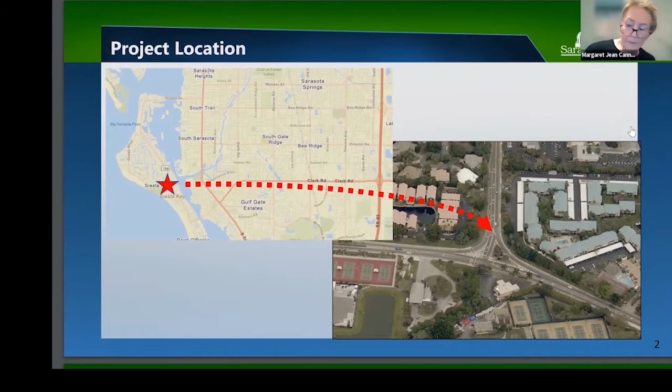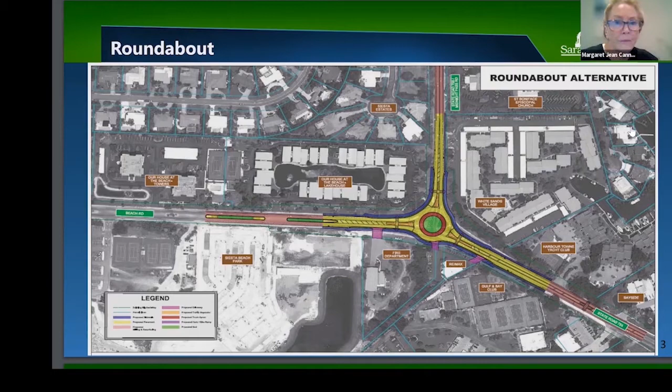This is the general layout. Last time I was here was probably a couple years ago, at least last year. So we talked about options on whether it would be a roundabout or a signalized intersection. The county commission did some public outreach and made a decision to put a roundabout in this location rather than a signalized intersection. That was the preliminary concept plan. If you go to the next slide, some of the benefits of this roundabout are listed here.

Having a signal in a location is a liability, especially during storm events or power outages. You have to have some means to manage the traffic movement at the intersection if it goes out. Sometimes they flash if they still have power, sometimes they just go out completely. Like during Hurricane Irma, we had many intersections go out, and we ended up putting up stop signs at those intersections. So one of the primary benefits of a roundabout is that it works regardless of whether you have power.

Some aesthetic things as well. The aesthetics of the roundabout generally would probably look a little better than the signalized intersection you see out there. Good things, overall delay is...

Let's go back to the other one. With the roundabout, if you're familiar with them, you don't have to stop, unless there's someone in the roundabout. So generally you don't have to stop and wait 60 seconds for the light to flip. It has a much better volume movement of traffic through that intersection rather than the signalized sequences that happen there.

And then the points of conflict are significantly reduced with the roundabout. What we found is on all our roundabouts, you significantly, if not completely, eliminate fatal or very severe crashes, because the crashes that do happen are generally some kind of side-swipe activity, not the head-on or T-bone type collisions that result in fatalities and severe injuries.

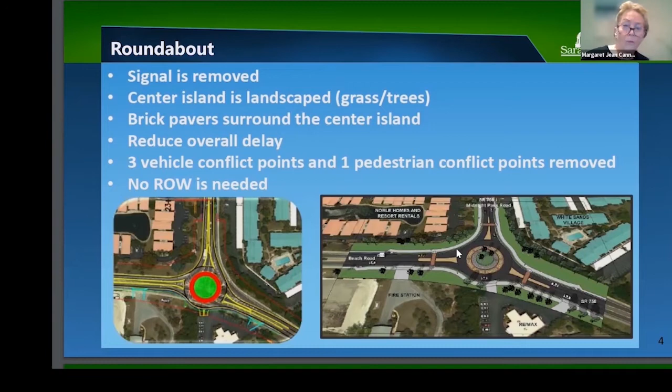So the next slide—this is just some concept looks at the roundabout from a street view that were provided previously.

Pardon, I have a question. Yes, sir. It looks like that center circle has nice trees on it, some stones, and some pavers on the outside. Couldn't we use that more effectively for more traffic to get through there? It looks like we're constraining the roadway by having such a large circle.

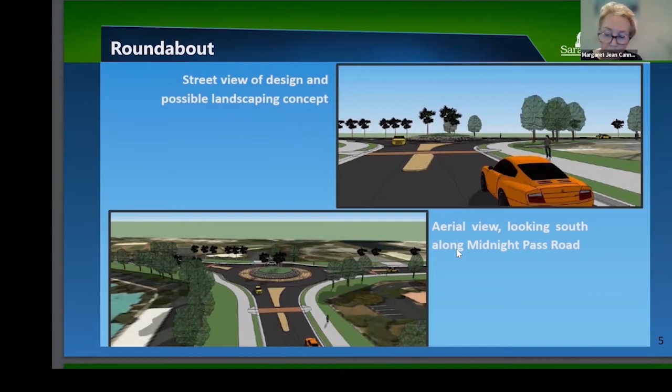Yeah, I'll show you what it's actually going to look like here—less bad than that. Well, not necessarily, and there's a point to that, but I'll show you when we have the graphic that's the current design phase. You can go to the next slide.

So I showed this before we had design contemplated—this was a picture I found on the internet. Talking to stakeholders, Bob and Catherine, there was a real desire to have the westbound or southbound movement along Beach Road keep that left turn like it does now. You can see the two lanes that come—this would be looking down Beach Road from the park down towards Midnight, down towards Stickney Point. So that dedicated left, instead of having just one lane, you can get right into that left turn and come around, while all the through traffic has the middle lane to get through.

So these are also benefits that happen here: traffic calming. You don't have the quick startups or fast slowdowns at a roundabout—generally everybody comes in and yields. When there's congestion, there's going to be congestion whether it's a roundabout or a signal; that's just part of traffic. The fire station will have access—that's being designed into the movement for the new fire station there. Go ahead to the next slide.

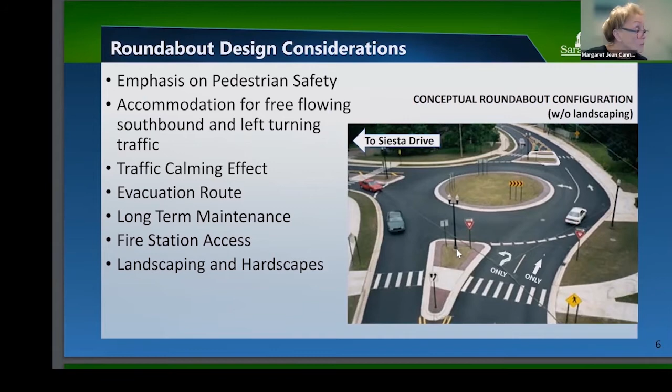These are some of the disadvantages and advantages we talked about with the roundabout versus the signalized intersection. This is rehashing everything we already talked about, just as a reminder. Catherine has a copy of all this, so if you want to see these in more detail, she can provide that information.

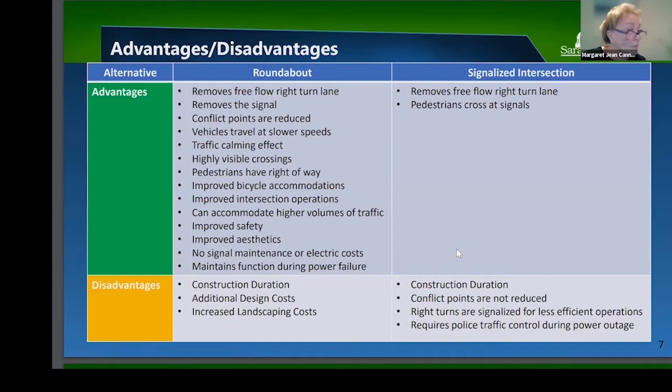So this is what we currently have. We're at a 30% design status, which is actually going to be completed in May. This is a preliminary drawing they gave me.

As you can see, the center section is large, and it's intended to be large. What that does is, instead of allowing cars to come through on a straight path, they have to divert, which slows them down and provides that traffic calming effect.

The outer rim of that is actually mountable. So when large trucks come through, it's designed so they can ramp up on the exterior of that apron and maneuver around the roundabout. Semi trucks and some fire trucks with that long wheelbase would need to mount up on that, but typically the cars will just come around.

Some features of this: you see the two lanes, the through lane and the left lane, on the west side or south side of the roundabout, at the bottom of the graphic here. And then you have 10-foot sidewalks on all of the approaches, which is double the width of the existing sidewalks, those should be about 5 feet.

The crosswalks are on the outside of the roundabout. We haven't really determined the actual control for those crosswalks. You have the rapid rectangular flashing beacons that are down Beach Road. There's also another type of pedestrian control called a HAWK signal - a high intensity activated crosswalk - that's an actual signal that turns red and green with some flashing sequences as well.

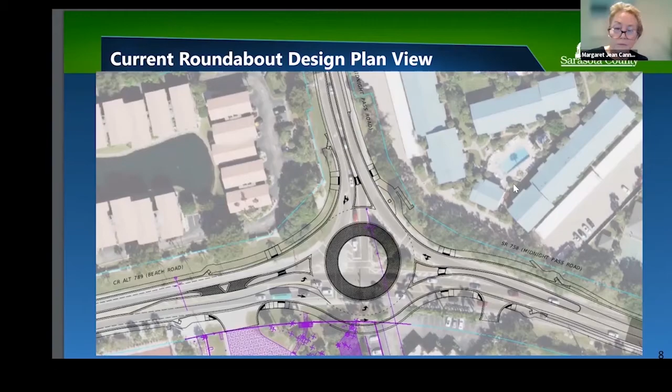Yeah, we have a program, as you all know. There's some things here we need to get to, and I do want to end on time. I have a feeling we're going to be talking about this again, so for now, if we can focus on what I invited you here for. I think your comments you should write to us and we should share them, especially if there's some similar enough about whatever's coming next, because we've never had a conversation about whatever else might be planned in the future. We just never had that. So I think it'd be worthy to put that in an organized way and address it when we can. Does that make sense right now?

Absolutely. So our schedule—one question that might be helpful to Spencer is, he told us the county commission has approved the roundabout. It's a done deal as far as they're concerned on the roundabout. But the issue that's outstanding, that he's still open to, is where the pedestrian crosswalks will be and how they're signalized. Is that true? Right, how they're signaling. The location of them is pretty well set. Whether it's going to be a stoplight or a flashing light, that's still open.

And all of us have opinions on that. The other question is how bicycles are going to navigate this. Maybe we have to have another session on that. But I'd like to give him some feedback right now. So everybody who wants this roundabout, raise their hand. Everybody who doesn't want this roundabout, and wants it left like it is, raise their hand.

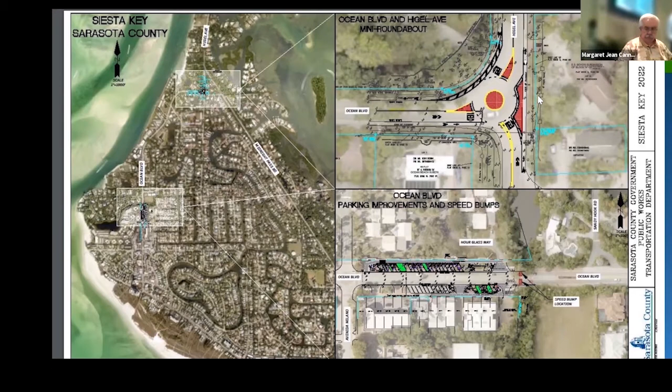The other one there, bottom right, is the parking lot spaces we just put in along Ocean. You've probably seen those—county crews did all the construction. It took a few months, but those are all pervious pavers, so there isn't any additional runoff made. We also just installed power, so there's going to be an electric vehicle charging station with two ports at the very west end of that lot, next to the ADA spot. That was actually very successful.

And if we go to the next slide, I think I have some more information on that. So those are some things.

The Higel Avenue curve—we're waiting on materials. We're going to put new signage, some illuminated reflective pavement markers through that curve, and some flashing chevrons. It's been an ongoing issue to get that constructed. We had some state money for it, but that was going to be too difficult to actually work with, so we're working on some swaps with the state to get that work done soon.

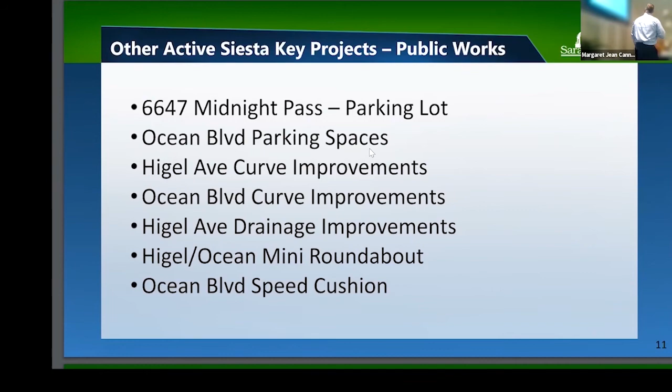Okay, there's a speed cushion we're looking at. On the bottom of this, you see those two little red rectangles coming in and out of the village. Catherine has had some concerns about people speeding up into and out of the village. We have a couple speed cushions in hand, and they're low profile, not speed bumps, just enough to give you a deflection in the roadway to slow you down a little. The good thing about the design is they don't slow down fire apparatus. They're spaced just enough to catch regular vehicles, but the wheelbase of a fire truck or ambulance is just wide enough to pass unimpeded.

That's one of the big concerns about speed bumps or speed humps, that it slows down response time for fire and EMS. These are going to be put in, probably in the near term, but we wanted to get done with the parking spaces first. There's going to be some more landscaping around the parking spaces we just put in, but they're full. They seem to be working okay, and they're deep enough that they don't impact traffic.

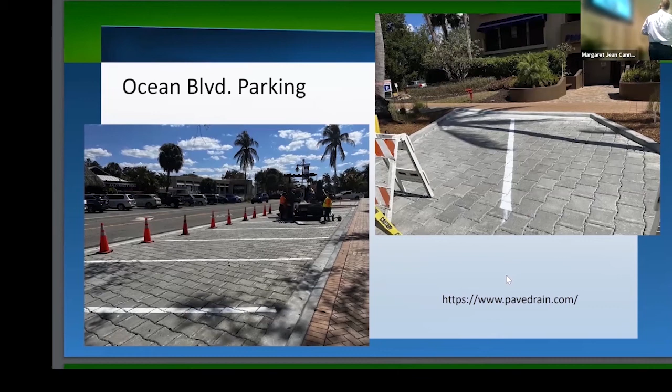Just a couple more things, I think I had some supplemental slides. That's the parking spaces we put in. Those bricks are about 50 pounds each, and they're all individually laid. That was a lot of work for our folks, but it turned out really nice on both sides of the road.

So those are the internally illuminated RPMs that actually light up. They're solar powered, with internal batteries that charge during the day and power on at night. That's an example of what those are. This is where the curve is. Some of the same things are going to be added there, along with better signage and removal of some of that extra asphalt.

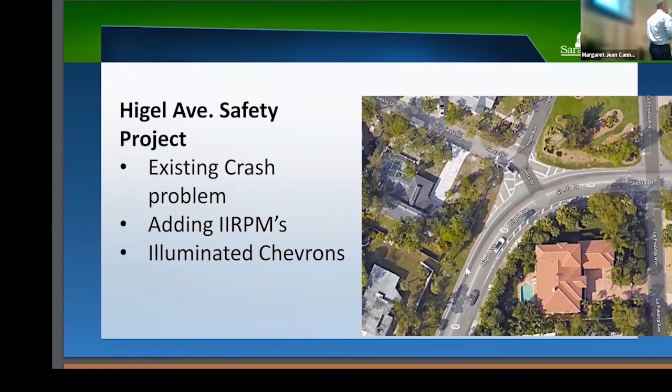So that's the project stuff. Anybody have any questions on those things?

Two points: Higel and Ocean. The sign there says traffic on Higel doesn't stop. Right, they don't know it's Higel. It should say cross traffic doesn't stop. Okay.

The next important thing on your curve where you're having a problem, today's headlights don't illuminate those arrows, they're too high. They're going to be lit now. So the ones we're putting in will have those blinker lights around the outside and blink in sequence, so they'll be lit at nighttime. We did that somewhere else down South County, and it's amazing the difference in visibility for vehicles coming through.

Hey Spencer, quick question. The village parking, we talked about it maybe a year ago, is 3-hour parking. I think if we could manage that, we could pick up triple our parking spaces. Is there any chance of that?

This is your last question. Go ahead, no Spencer, don't tell me it's my last question, Gene. Stop that and please let him answer. All right, well I'll let him answer, but I'm being asked not to let anybody come in.

I'm not sure about the 3-hour parking thing. I don't know how that's enforced or who might be in charge of that, but I hear you, and we have to take another look at that. I'm not sure there's any parking officers out there to enforce any kind of time limit. Yeah, I just want to put it back on your radar. I don't want paid parking, just 3-hour parking for a time limit, I think that would turn over a tremendous amount of parking for the businesses. Gotcha. Thank you. Sure, thank you, Gene.

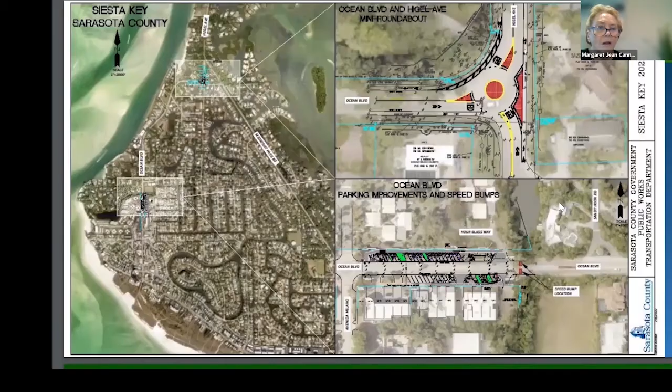Will the roundabout be done before spring next year, 2024? Based on the current schedule, yes. And Ocean Road is failing, any plans to redo that? Ocean along the beach roads, between the beach and here. Yes, we know, and it's getting a little bouncy in there, right? Yeah.

I need to check on what the resurfacing schedule is for that, but if it's not, I'm going to try to get it added to that other roundabout project. The state's actually going to come through with the resurfacing project. When we transferred, now these are all county roads up here. We transferred Midnight Pass Road all the way from 41 to 41. It's now a county road, but the state is still going to come in and resurface from Stickney Point up to Shadow Lawn Way. They're going to be doing sidewalk replacements for about a third of that, and the shoulders will all be replaced, and the signage will be upgraded with pedestrian crosswalks. So on either one of those projects, more than likely the county's project, if we don't have it in our current plan, I'm going to see about getting it added.

Just a point of clarification, Catherine mentioned it, is that there is a roundabout, from what I read on the transportation study, for Higel to Midnight Pass, in the area of Boyd Park. That was given medium priority, which means sometime between the next 5 to 10 years is when that's going to be, or am I wrong?

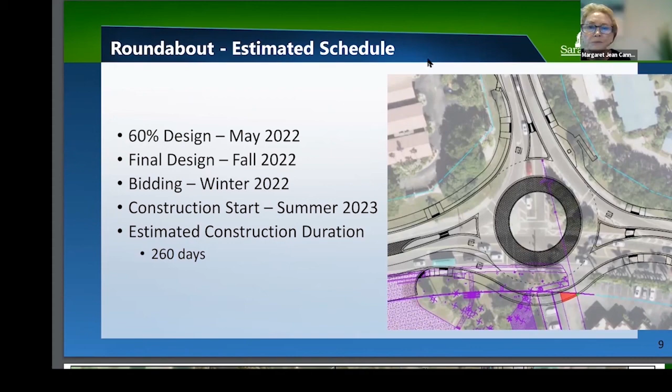It's something we've looked at just conceptually, because traffic on the key, at that signal, there's a lot of wasted green and red time, because usually there's one approach that has nobody at it, but you're still stopping traffic to let it through. So that's one of the things we thought about - if you have a roundabout there, there's no signal, there's no wait time for any of the approaches, it just keeps moving. But I hear what you're saying about the signal and how good it's been at reducing accidents at that location. So it's definitely something we take a look at before getting any further down the road, just conceptually, where might the roundabout work in the county?

Well, the only other comment, the last comment I'll make. I'm going to hold you to it.

Me too. If you consider that intersection there, right at Boyd Park, with that triangle there, and continuation of Higel and Midnight Pass, with the way it's been this year, with the volume of people and cars, etc. - I live there and I can attest to that - it's impossible to get off of Siesta and it's impossible to get on Siesta. That traffic light, I would say, is probably working better than any roundabout could do. Because in a roundabout, you would have enormous congestion of people trying to get out of the roundabout and people trying to get into it. I think a traffic light represents a much simpler solution, because the sheer volume of transportation passing in front of my eyes, I just say I can't believe this. This is insane. The problem is you've got 2-lane roads, Higel and Midnight Pass, and the 1 or 2 lanes going into the village.